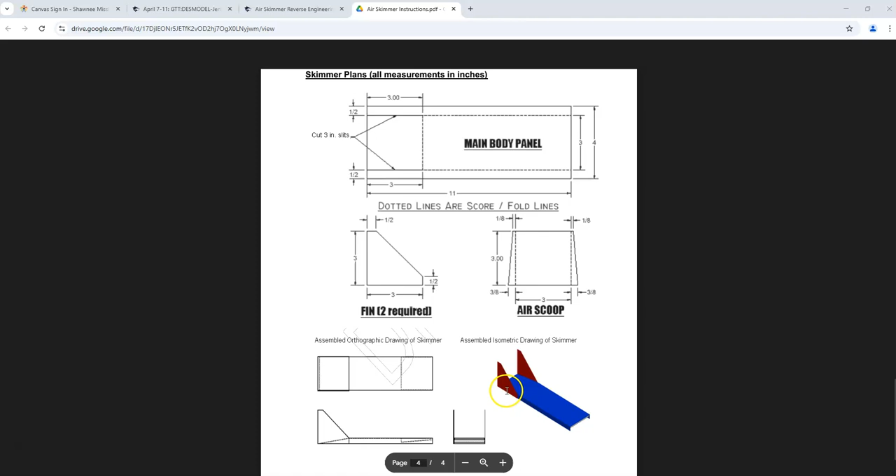Alright, we've been working on the Air Skimmer project. We've got all the parts done, and now we're going to go through and I'll show you how to assemble all the parts to complete this Air Skimmer. So we've kind of got an idea how it goes together. We need the main body panel, we need two fins, and then we need to place the front scoop right in the very front of the Air Skimmer.

So with that in mind, we're going to go ahead and open up Inventor, and we're going to create a new assembly. Then up in the left-hand side where it says place, we're going to open that up, and then we're going to find the parts that we need for this.

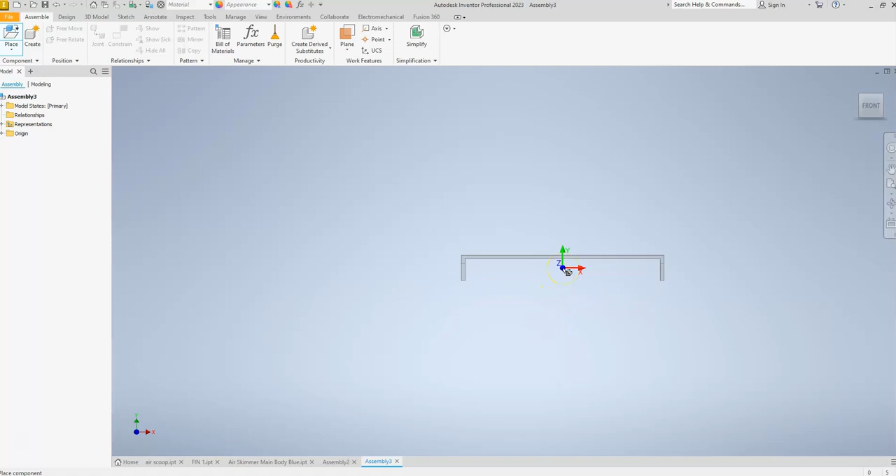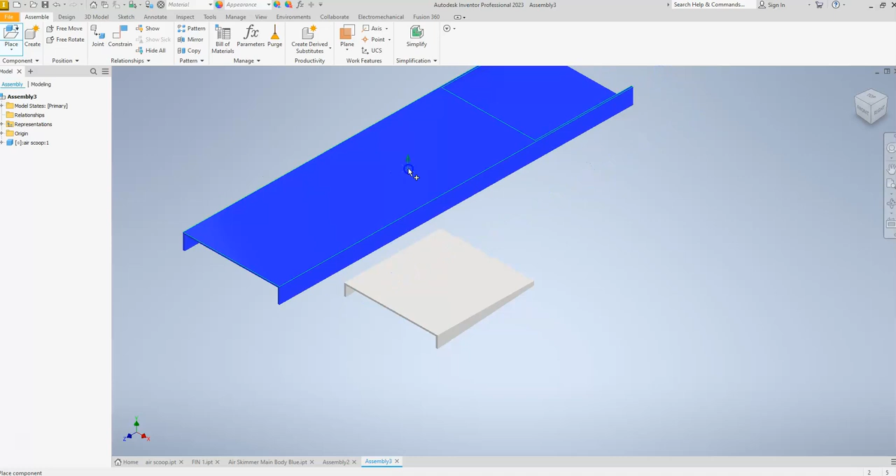So I need the air scoop to begin with, so I'm going to go ahead and open that up. I'm going to place one of those right here, and I'm going to right click, go to OK, go back to place, and this time I'm going to get the main body panel, and I had added color to that. I made it blue. So we're going to place one main body panel, and then we need to bring in two of the fins.

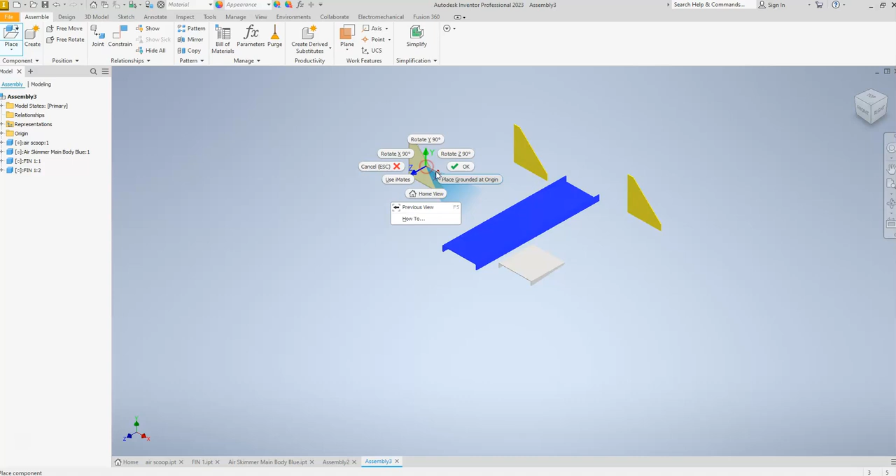So those are in here. That's this thing. And one. There we go. So we're going to put two of these into the assembly. Right click, go to OK. And now we can start using some constraints to put these together.

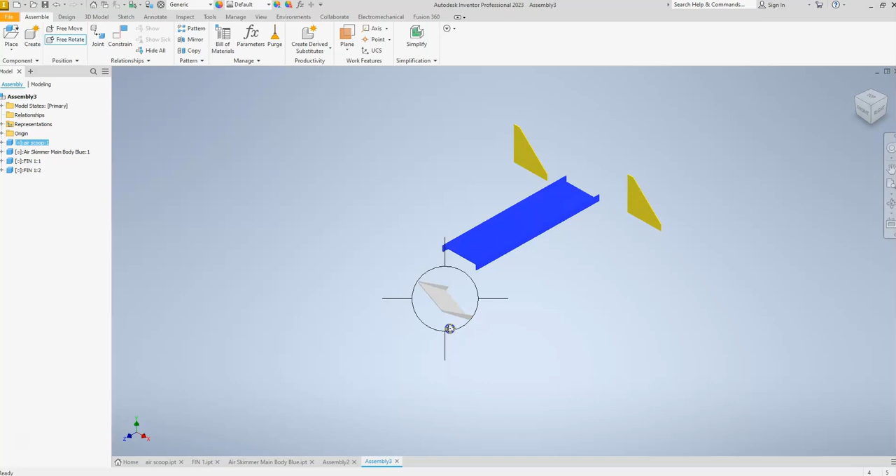First of all, I'm going to right click on the front air scoop, and I'm going to go to free rotate, and I'm just going to drag that around to get it somewhat close to the way that it needs to be positioned to actually fit into the main body panel. It's right about there. It's good. Just click outside of that so you can get out of the free rotate command.

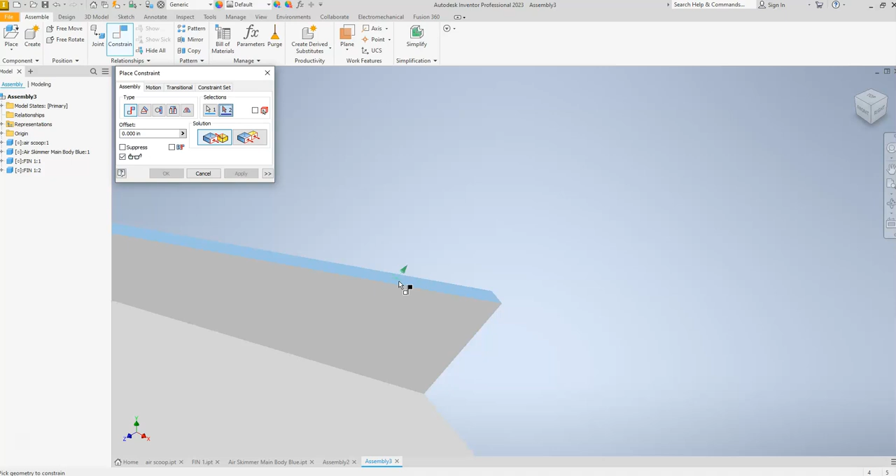Go up here to constrain, and I'm first going to mate two surfaces together. So I want this really thin, narrow surface right there, and that needs to go to the very bottom side. I'm using the view cube to rotate this around, but it needs to go to the bottom side of the main body panel right there. Apply that.

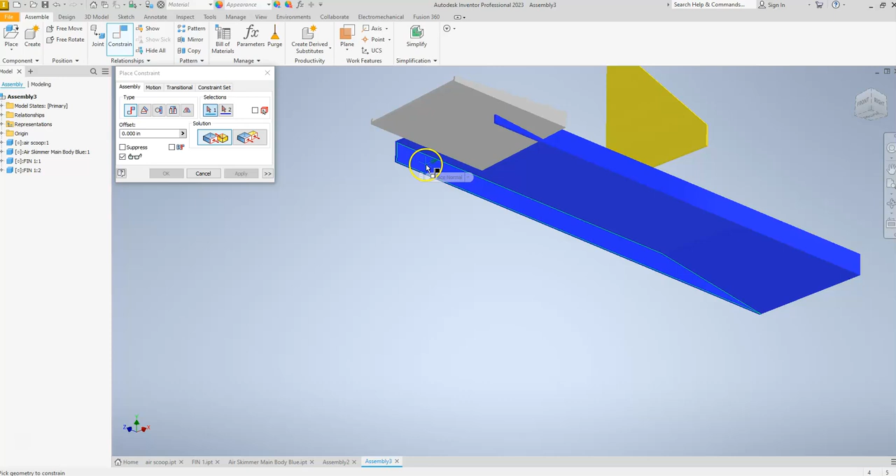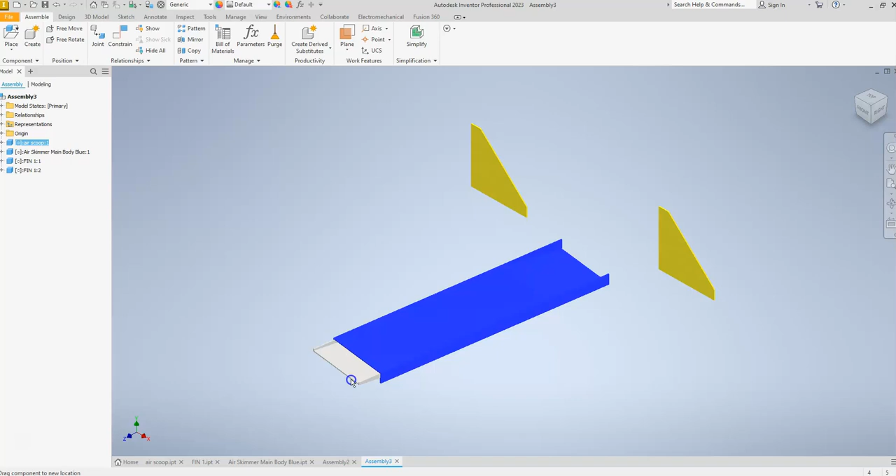Now I need to center this, so I'm going to use the mate command again, and I'm going to make the inside of my main body panel like right there, and then use the view cube to click and rotate it around, and then you want this side of your front air scoop. Apply, and now let's zoom out so you can see what that did. So it's centered in here. The only issue, if I cancel this, you'll notice I can still drag this and move it around. It's centered in the right place, but we want it actually constrained in that.

So I'm going to go to constrain, and I'm going to use one more mate command. And this time, instead of a face, like a surface, I'm going to use a line. That little corner, or edge, I guess maybe you call it, to this one. Right there. And I couldn't do the faces because that's not going to be flat because that was at an angle. That has to stick out a little bit like that. Hit apply.

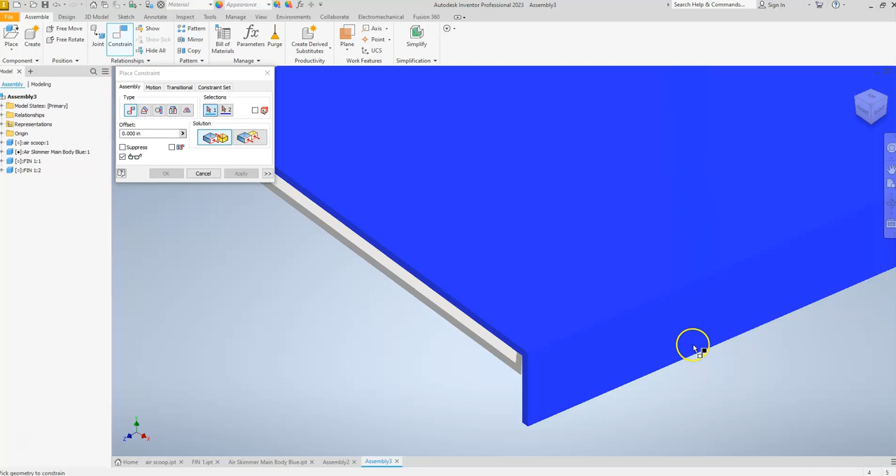And then we're going to go to kind of check out what this looks like. Close this out. And I can just kind of rotate this around so you can see. And if I grab it now, the whole thing moves together. It's all one. That's in. Now I just need to attach the fins.

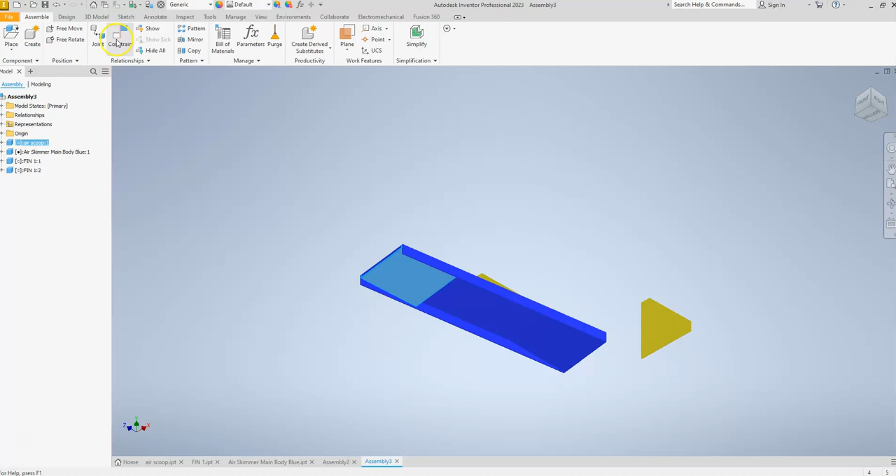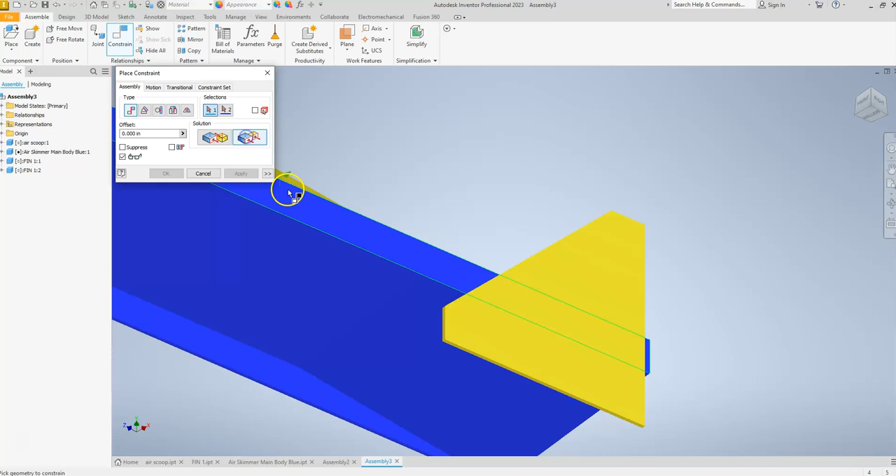I'm going to go to constrain, and I'm going to select the interior surface of this fin, and I'm going to attach it to this surface right there. Hit apply. And now I need to use the flush command because I need to even up the bottom edges of the main body panel, the fin, and the back edges. So I'm going to go to flush, and I'm going to make that surface flush with that surface. Apply.

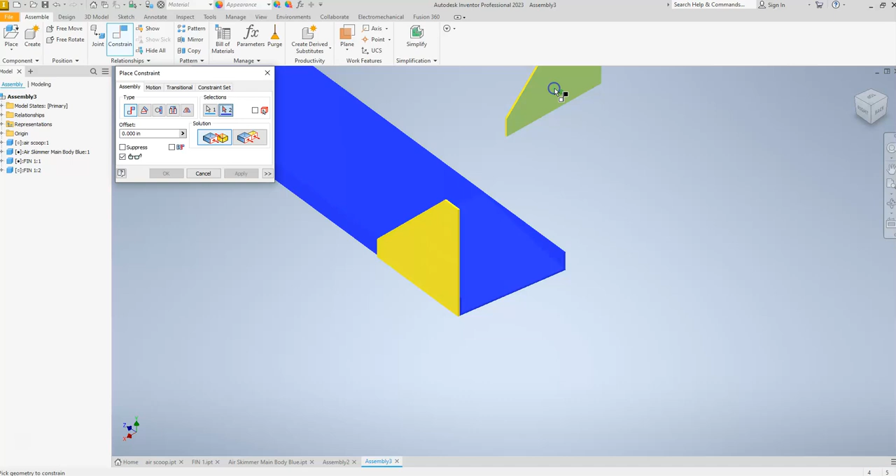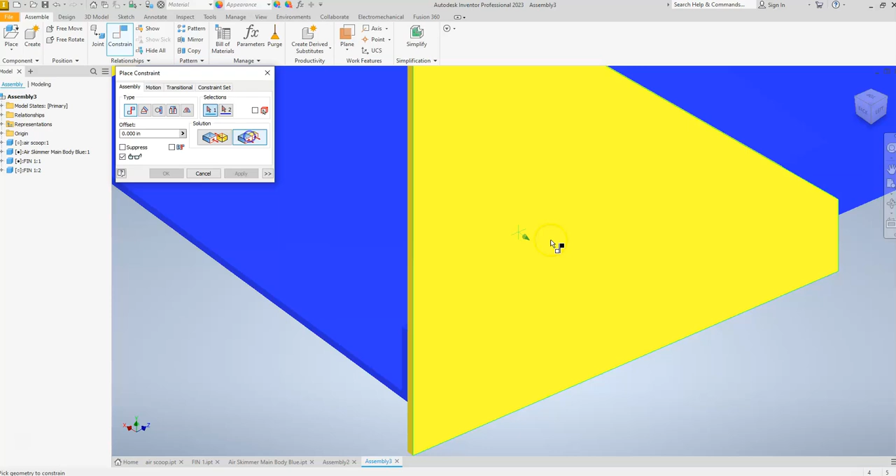Mate this surface. Be careful you get the right thing selected. That surface, apply. Then use your flush command to get the back edge and the back edge, apply. And then again, we're going to rotate the cube.

So we can kind of see the bottom edges here. We want that one to that one. Oh, I think I got the wrong thing there. Let me rotate this around a little better. There we go.

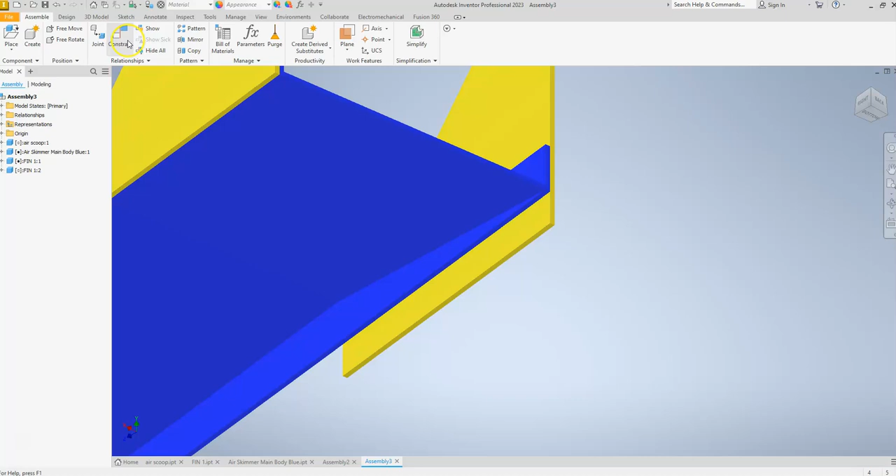So constrain, flush that surface to that surface, apply. There we go. Let's hit home so you can kind of see that. Just move it around. That's it. So we've got it all assembled together. Front scoop, main body panel, both fins. So we can close out the constraint menu.

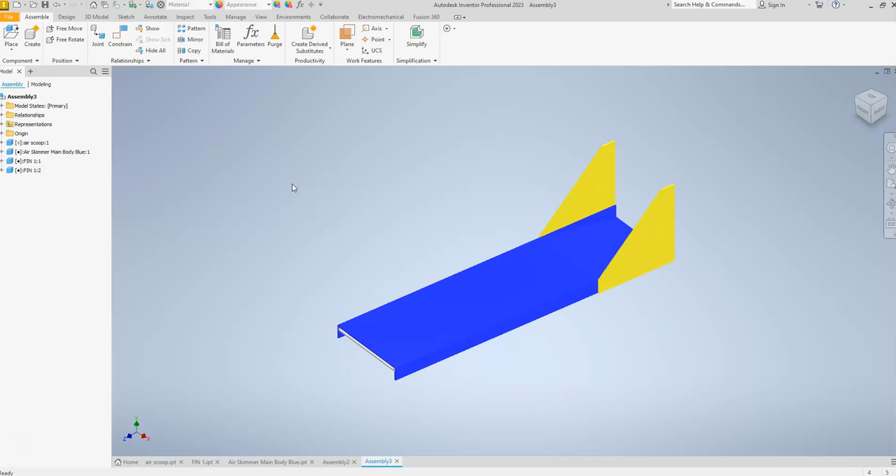Make sure you go to file, save as, call that your finished Air Skimmer, and then take some screenshots to upload and turn it in. So, alright, that's the Air Skimmer. Thanks for watching.